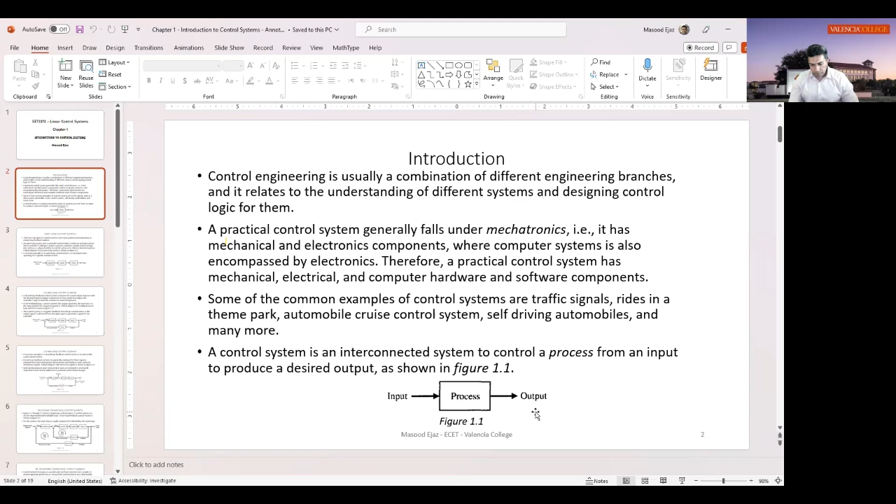So that's an example of a manual control system in which the process is your car or your steering system. You are sending the input, visually inspecting where the car is going, and you want it to be pretty much the same as the input. If you're turning 20 degrees counterclockwise, you want the car to go about 20 degrees counterclockwise.

So that's a manual control system, but that's an example of an open loop control system. There is an open loop control system, and then there's a closed loop control system. So what is an open loop control system?

Here's the figure. You want the desired output response, whatever output you want. As I mentioned about the car, you said, okay, I want the car to go 20 degrees to the left, and I'm moving the steering about 20 degrees. There's a controller, actuator, and process—these are the 3 main components of a control system. And then the output: what is the actual output? You want the desired output to be the actual output, but not necessarily, because there are many factors that can affect the output, and it's possible that it is not equal to the desired output, which is your input.

So if it is not, then of course you have to correct it. With the open loop system, the correction is manual. In the closed loop system, the correction can be automated. That's why closed loop systems are much more prevalent in industry compared to the open loop system.

So what is the open loop system? It uses a controller, control logic, to drive an actuator—an action that a controller takes to control a process. This morning in the DSP session, I also mentioned actuators, which basically convert one form of energy into another form of energy.

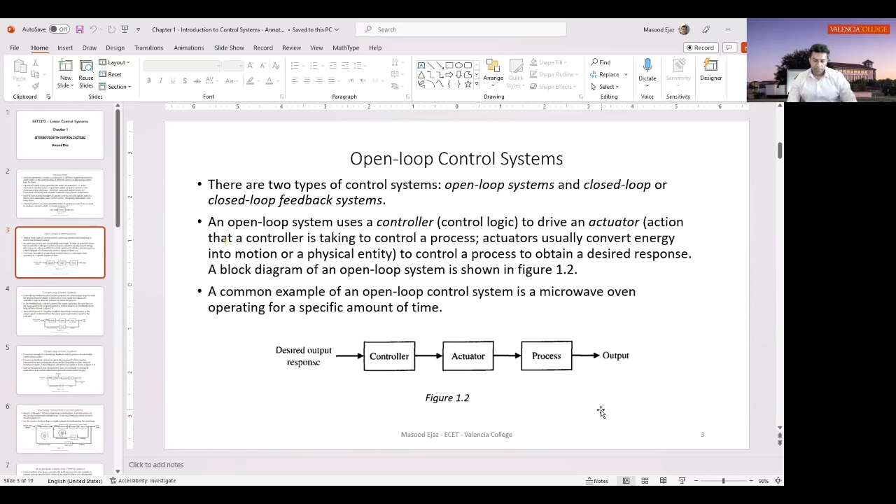And then you're observing: hey, what's my output? If your output is exactly the same as your input, because your input was the desired output, your control system is working perfectly. If it is not, then you have to make changes to some of the parameters in your control system. One common example is a microwave oven operating for a specific amount of time—that can also be represented as a control system.

Let me grab my pen real quick. Okay. Let's see, review. Okay.

So the good thing about the closed loop control system is you have the ability to measure the actual output with the desired output to generate an error signal. If they are too different, there's too much difference between them, then your error signal is going to be high. If there's a little bit of difference, the error signal is going to be low.

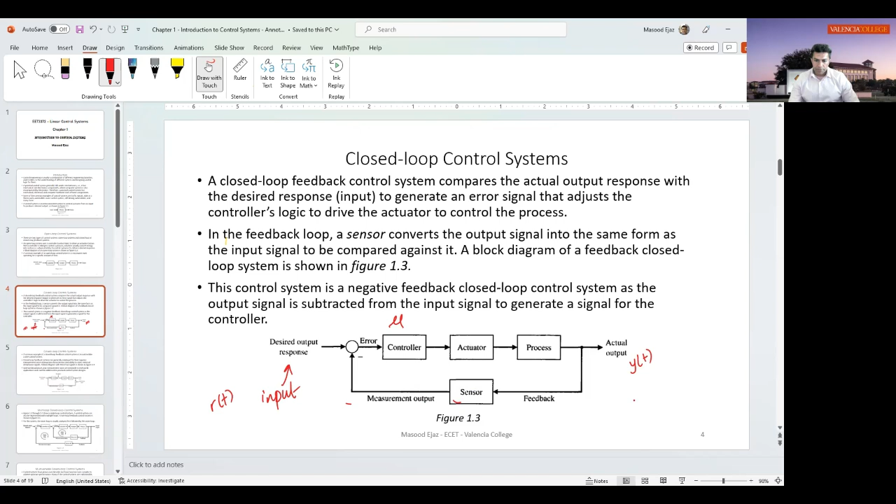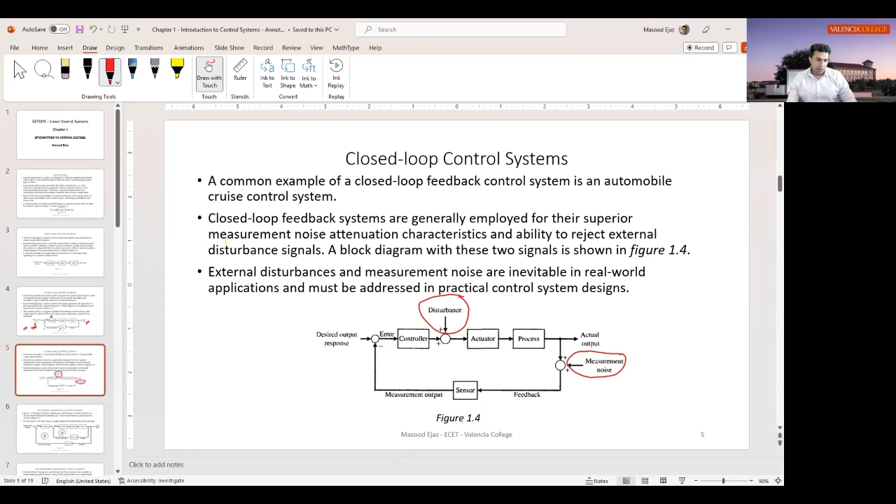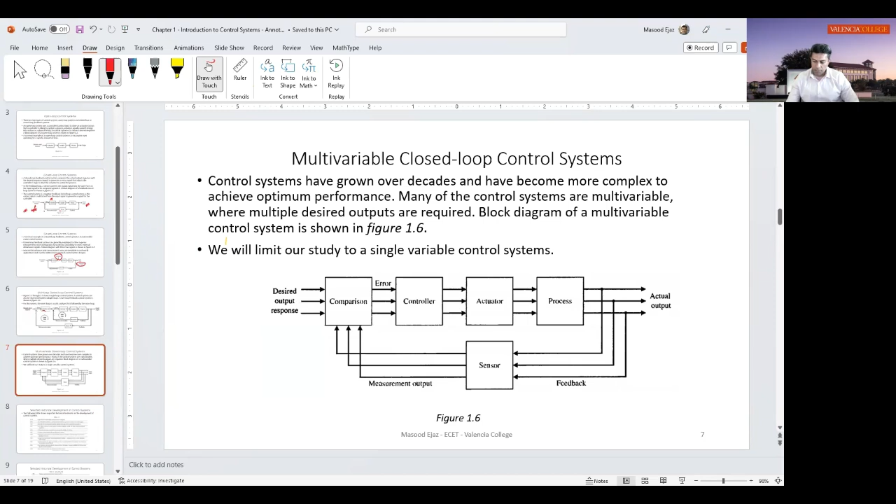But you can have different systems with multiple inputs that you want at the output. Instead of a single signal flowing, you have multiple signals flowing throughout the system, one for each input that you want at the output. So these types of systems are also there. I don't think I'm going to be doing any examples with multi-input, because it becomes too complicated to analyze at certain points. Just want to mention that these practical systems exist, but we'll be doing problems based on multi-loop systems, not multi-variable systems.

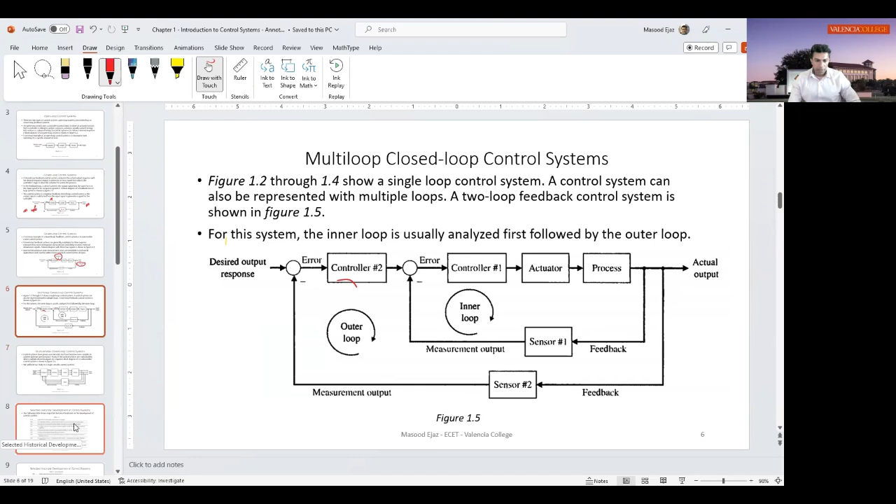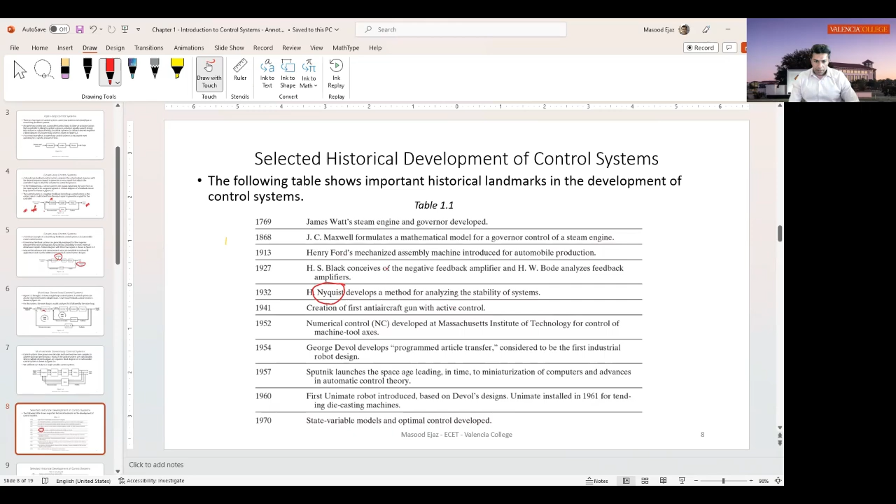I don't want to go all the way back to 2019. I'm assuming when the book was published, I picked up this table from the new book, but it's possible I picked it up from the old book since it ends at 2019. It's 2023, so some major advances must have been made in control systems applications. Not the theory - control system theory really didn't change much, but the applications have changed a lot. So they're just showing the different applications.

GPS is a multi-input control system.

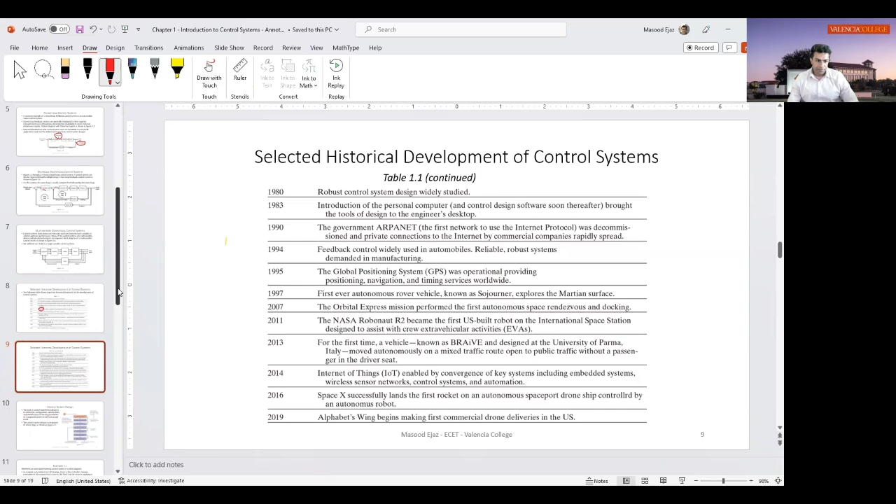What we can do is 1 hour 15. Actually, no, I thought this class started at 5 o'clock. It's only 45 minutes. So we will keep going, and let's see if we can finish before the first break. Then all of us will be happy.

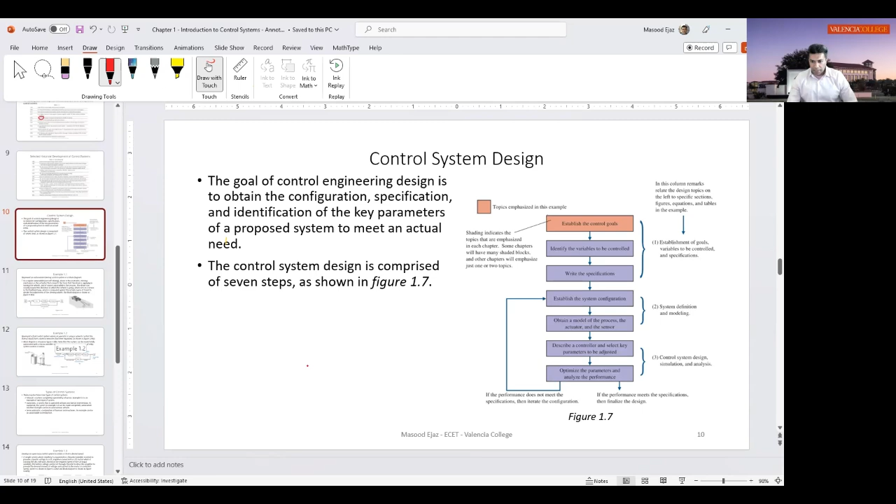All right, control system design. Let me increase the...

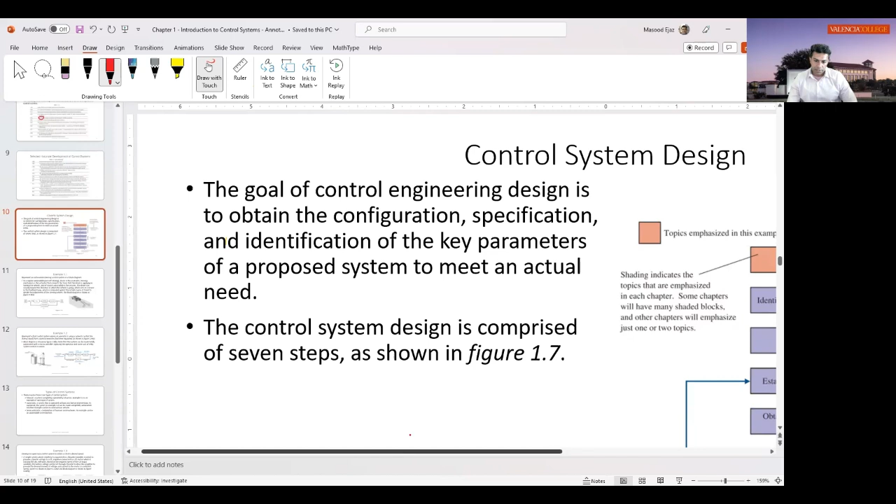So what are some of the specific key parameters to design a control system? They are given in this diagram, flowchart, and again this is from your book.

The first thing you do is establish what your control system needs to do - you establish the goals of the control system. Then you have to identify the variables that are involved to establish those goals.

Write the specifications. If some of you have taken the senior design proposal course, or if someone here is doing the project, you'll see basically similar things when we do senior design. You have to establish the requirements of the project, which are the goals of the project. You write the specifications of the project and all those things - that's basically creating a control system module.

So you establish the goal, identify what type of variables are involved to make those goals successful, and write the specifications of that.

Specifications are basically - if you're using some system, let's say a microcontroller - then how many bits do you want for that microcontroller? How many inputs and outputs do you want? What should be the processing speed? Those are the specifications - so you establish the specifications.

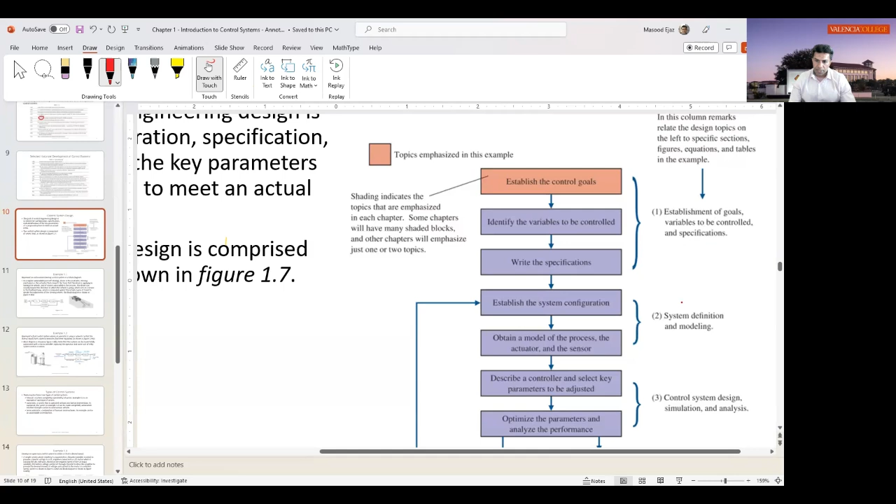So once you choose the specification - establishment of goal, variables to be controlled, and specification - then the second step is system definition and modeling. Establish the system configuration, obtain a model of the process, actuator, and sensor, which is in the feedback loop. Describe a controller and select key parameters to be adjusted for the controller.

I keep calling it microcontroller, just a controller. Based on your error signal, you go back through the feedback loop and change the system configuration based on the error signal. What is the error signal? The difference between the desired output and the actual output - that's the error signal.

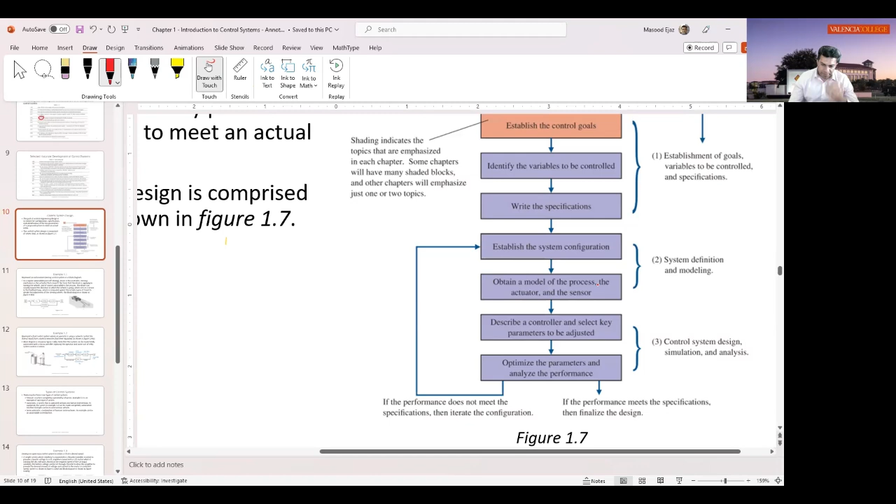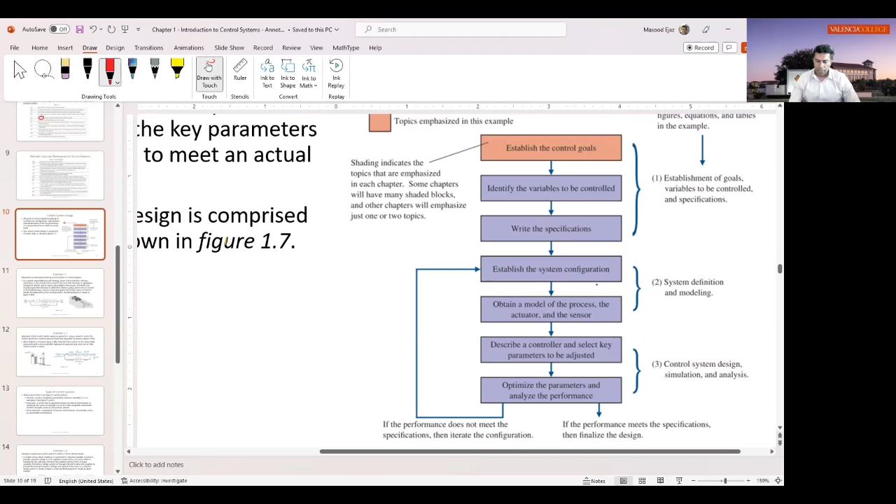So this is 6 or 7 steps of creating a control system from the bird's eye view, the big picture. So let's look at some examples.

This screen is hard to move. Okay, I'm going to put it somewhere on top. All right, here you go.

The steering mechanism is the actuator. You are putting force on the steering, left or right, creating torque, and that force converts into changing the direction of the steering. So steering is your actuator, and of course your process is your car.

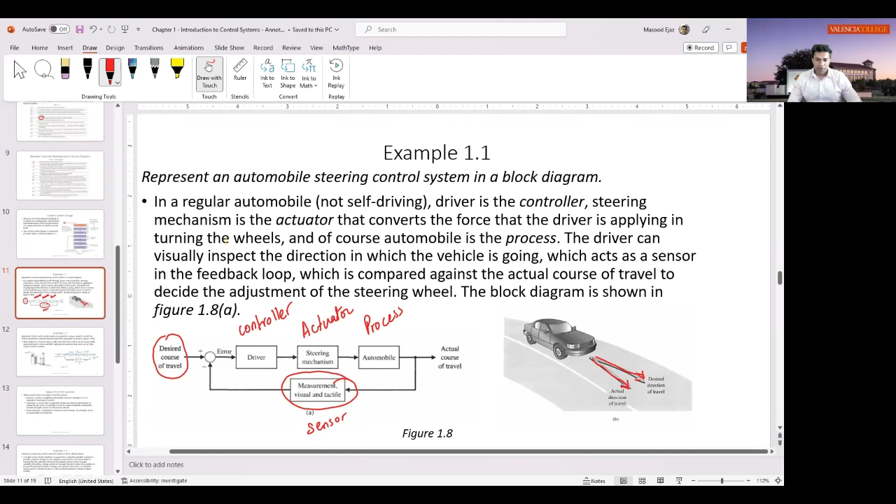One step ahead is, of course, let's see what is next. Okay, so cruise control is going to come next, I guess. Again, a kind of manual control system, and all these manual control systems again can be made fully automated. So your self-driving cars...

You're not the controller. In self-driving cars, the signals that are coming from your sensors that are on your Tesla or any other car, camera signals, signals from IR sensors, radars, and all those - I think Tesla removed the radars actually - but all those signals are coming into the main processor, and based on those signals, it is controlling the steering wheel. So in that case, you're not the controller in a self-driving car.

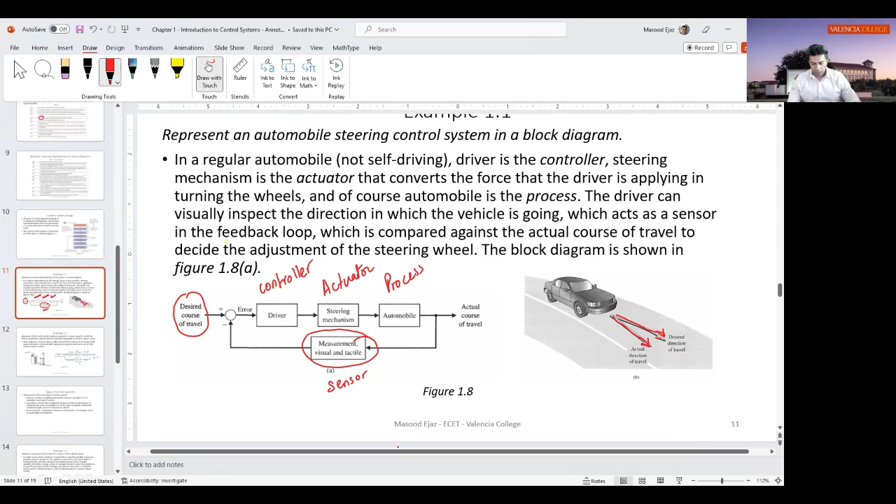The signals that are coming in through the microcontroller, that is the controller actually. Well, microprocessor, microcontroller, or computer, whatever. But this is the manual system. What is this?

All right, so this diagram represents a control system where an operator is using a valve to control the flow of liquid from a tank to keep the fluid level regulated, right over here. So this operator is inspecting the fluid level visually, and he wants the fluid level to be a specific height in the tank. If the fluid input starts filling up the tank, then he is going to open the valve to let the fluid go so that it will stay at that specific level. And of course, if there's no fluid, then he's going to close the valve so that it will stay at that level. So that's the control system.

Again, it's a manual control system. It can very well be made an automated control system very easily. But for this manual control system, you have the desired fluid level, which is your desired output response. As you can see, your controller is this guy, the operator. The actuator is this valve mechanism. He's turning it right or left to control the valve. And of course, the process is taking place in this tank.

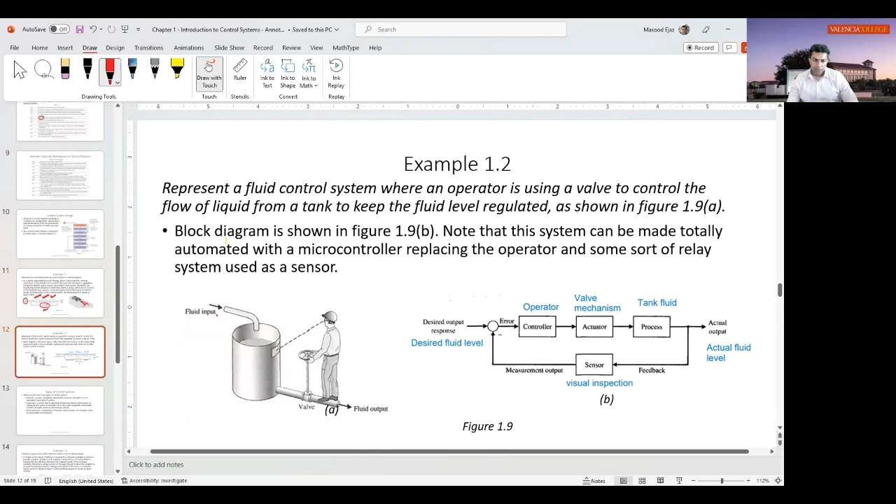The actual output is the actual fluid level in the tank, and he's going to inspect it through visual inspection. Again, if the actual fluid level is higher than the desired fluid level, it's going to open the valve to let some of the fluid go. And if it is equal to the fluid level, it's going to close the valve. If it becomes lower than the fluid level, then it's going to close the valve and let the fluid gather in the tank until it reaches the desired level.

So again, in terms of a control system, it's a manual control system. And these are the actuator, controller, and so on for this control system. As I mentioned, the system can be made totally automated with a microcontroller replacing the operator and some sort of relay system that can be used as a sensor.

Yeah, this system is very common actually. Most water storage systems have a pump basically that can pump the water, and based on the height of the water level in the tank, the pump can turn on automatically or turn off to maintain the height. So this system is very common, and it is a very common automated system basically to keep the fluid level the same in a water tank.

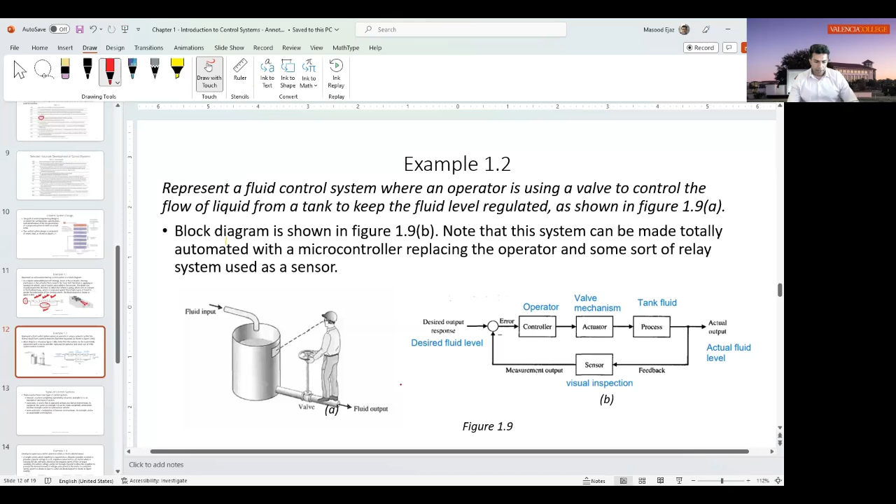So those systems that we discussed were the manual control system, a system completely operated by human, and the automatic control system, where there is no human intervention, a totally automated system.

Many of the systems these days, starting from smart cars to ride control systems using PLCs and all, are automated control systems. They keep detecting the error and keep adjusting themselves to operate as they're supposed to. Of course, there are exceptional conditions, that if this exception happens, turn the ride off or do this or do that.

Many systems are semi-automatic, like your assembly lines, automobile assembly lines, where you have robots doing a lot of things, plus humans are there to assist in building an automobile. So that's a semi-automatic control system. So all three of them exist - automatic, and semi-automatic, they are much more of interest rather than manual control system.

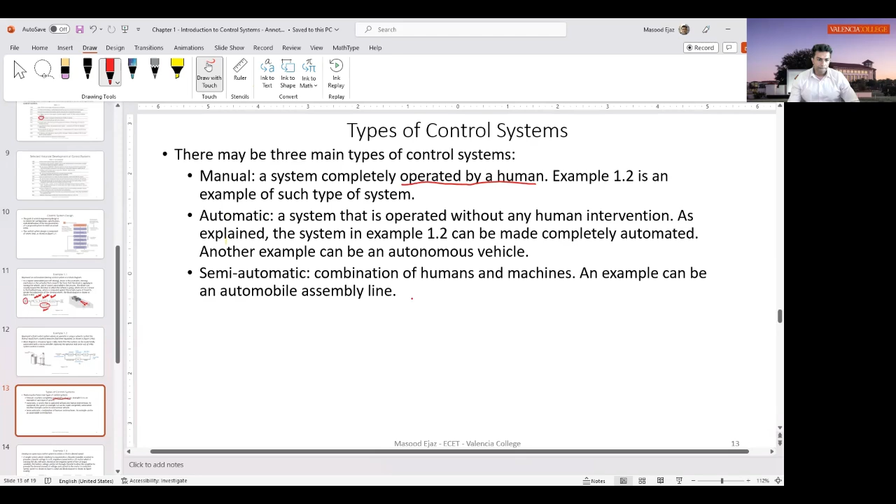All right, let's see example 1.3. A simple system where a battery is connected to a variable resistor to provide a specific voltage to a DC amplifier connected to a DC motor, which is rotating a disk. I don't know what I was trying to write over here, but basically it is a rotating disk.

You can assume it to be a CD player or something, and based on the voltage and current coming into the motor, it will increase or decrease the speed of the rotating disk. So based on the required speed of the CD input variable, the battery voltage can be set through a rheostat to drive the amplifier to provide the desired amount of voltage and current to the motor to control its speed.

This is an open loop control system. As you can see, there is no feedback. You need desired speed, which is sent by specific voltage to the controller, which is this amplifier, the DC amplifier. And that is going to send the current, higher or lower, based on what speed you want, to the DC motor, and it's going to start rotating that disk at that specific speed.

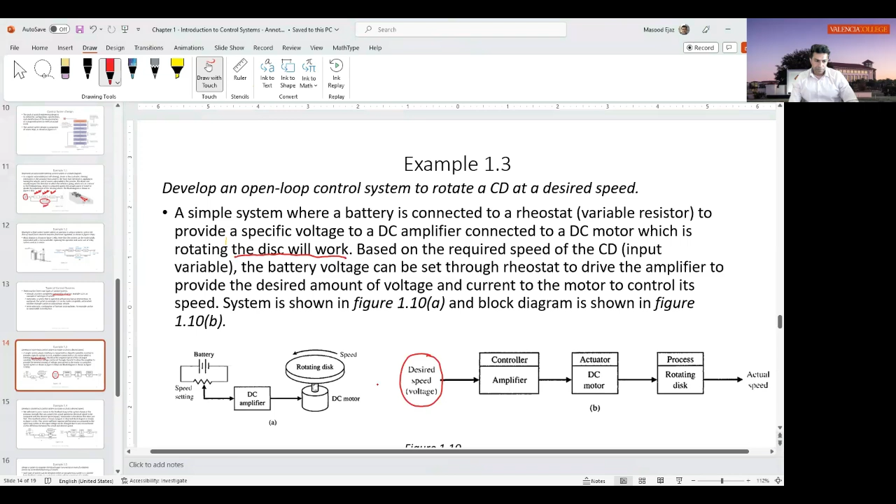Same thing, but with the feedback loop. So now you are adding a tachometer in the feedback loop. That's the sensor - so you're measuring the actual speed, and the tachometer is converting that speed into a voltage signal, an electrical signal, which is measured against the desired speed. If they are the same, the error is 0, or if they are very close to each other, the error is very small, meaning the actual speed and desired speed are very close. If they are not the same, the error is going to be large, which will make the amplifier send a higher amount of voltage or current to the DC motor, speeding up the rotation of the disk.

So if the error is positively large, that means actual speed is less than the desired speed. If the error is negatively large, that means the actual speed is more than the desired speed, because remember, you're subtracting the actual from the desired speed. So the error can be positive or negative.

If the error is negative, that means desired speed is less than the actual speed. In that case, whatever the error signal is, the amplifier is going to reduce the voltage it is sending to the motor, reduce the amount of current, and the speed of the motor is going to be smaller. It's going to slow down, basically. So that's the example of the same system we had, but using a feedback loop, using a tachometer as the sensor to make the system fully automated.

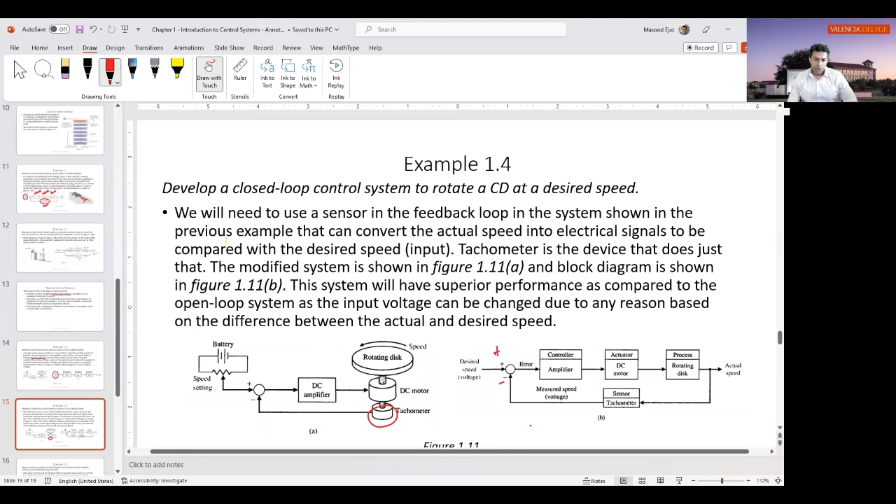All right, another example. Design a system to regulate the blood sugar concentration level of a diabetic person by controlling the dispensing of insulin. This is a very commonly used system. Many people who have diabetes use this type of system.

This type of system can be open loop, timer based, dispensing a specific amount of insulin at a specific time without actually measuring the blood sugar level. Many systems are closed loop, measuring the blood glucose level, and based on that level, dispensing the amount of insulin required for the body. So both systems exist actually, open loop as well as closed loop.

Many people actually use the open loop system because they say, we take insulin only at a specific time after we eat, lunch or dinner. So only at that time they want to dispense a specific amount of insulin. They're not measuring anything, or they're measuring manually, and based on that adjusting the amount of insulin needed. But they don't have to do that if using a closed loop system that measures the glucose level automatically, and based on that adjusts how much insulin needs to be dispensed and when, which can be set through closed loop systems as well.

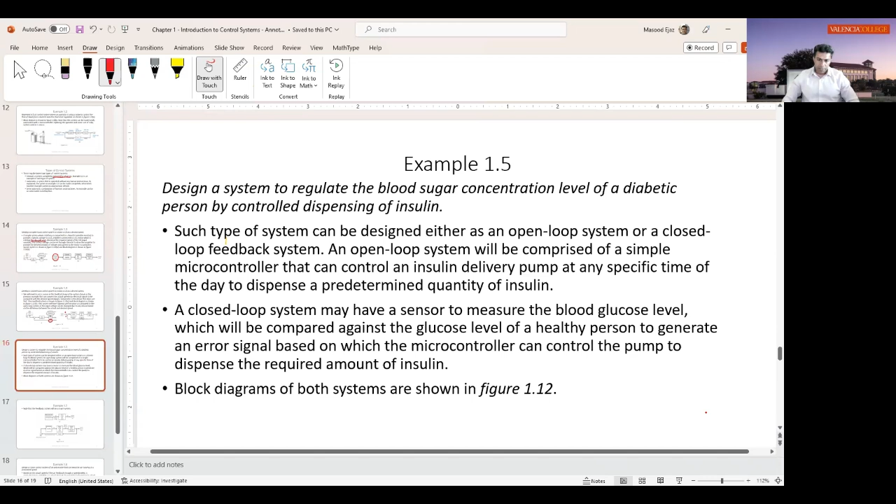So both systems can be created, they do exist, as I said. And these are the block diagrams of those systems. The top one is the open loop. So you have a microcontroller program, signal generator basically, that at a specific time starts sending the signal to the motor, pump, and valve to dispense a specific amount of insulin.

And in the feedback loop, you want your glucose level to be a specific value. Again, you're sending the signal through the microcontroller, amplifier, motor and pump, insulin delivery rate, and your process is the human body, of course. After it dispenses the insulin, the system measures the actual glucose level, and based on that, it sends the data back through the sensor.

And then it is compared against the desired glucose level. If it is low or high, based on that, the insulin amount is adjusted. So as I said, both systems do exist. Many people use a simple system, very simple, manual dispensing without a feedback loop. I've seen many people actually using that simple approach because they say, we only dispense at a specific time, so we don't really need a closed loop system.

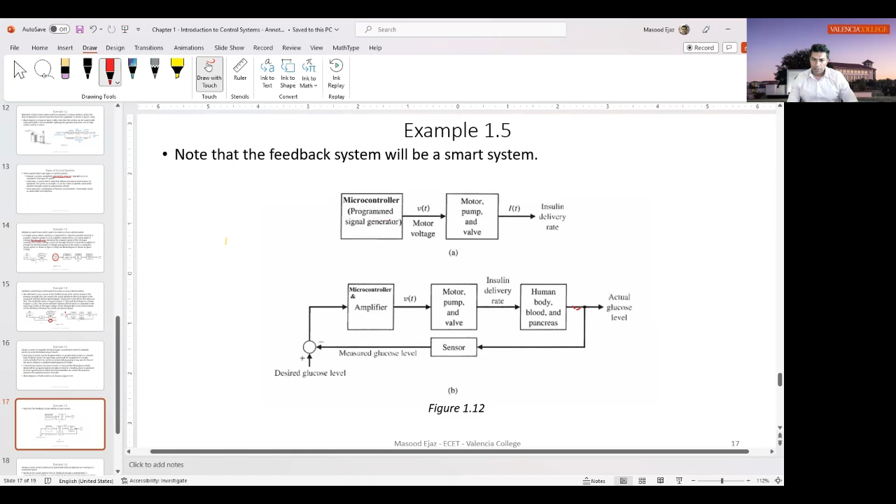One of the last examples is a cruise control system in an automobile that can make the car move at a prescribed speed. Everyone has used cruise control, I'm assuming. So you have a desired speed, and you have a microcontroller, of course. In this case, the actuator I'm putting is the fuel injector system, for gas cars, not electric vehicles.

How much fuel is going into your engine will determine the speed, how much you're burning, basically. An automobile engine is the process where the burning is happening. Of course, if it comes down to an electric vehicle, then you're going to change those things to how much current the battery is supplying to the motor, basically. So your actuator becomes your battery, how much current it has to supply to the motor to run it faster or slower to keep the desired speed.

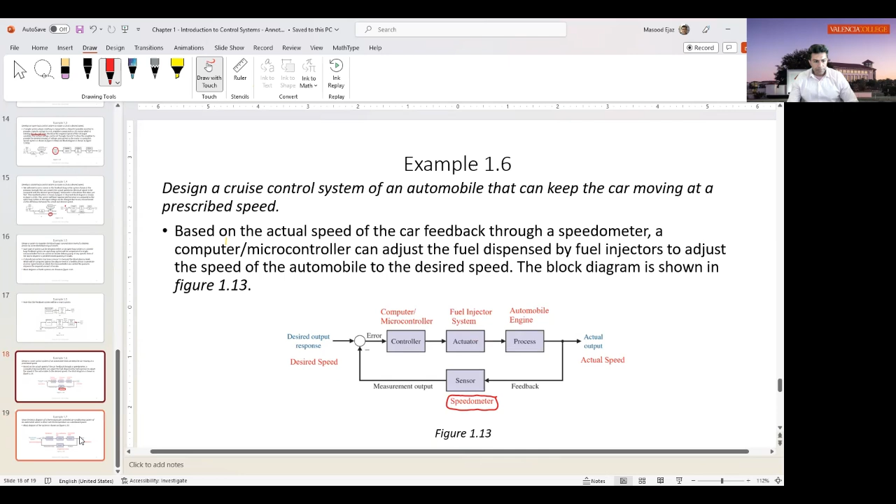The final example for today is the thermostatically controlled air conditioning system I mentioned earlier, in an automobile where a driver sets the temperature on a dashboard panel. So you want a desired temperature. It can be your automobile, your home, wherever - your AC, basically your desired temperature, whatever you want. You have the thermostat, which is your controller, and the air conditioning unit. In this case, the automobile cabin is the process. If you're using a home, then your home or room is the process on which the actuator is working.

You're measuring the temperature using a temperature sensor, and comparing it against the desired temperature. So the temperature sensor is basically converting the actual temperature into electrical signals to measure against the desired temperature. Based on the error, you can control the thermostat, making it cooler or warmer, so that your cabin stays at a specific temperature.

So this is basically your adaptive air conditioning system, where you can set it. The older cars didn't used to have that - you could just set a temperature and it would keep blowing the air irrespective, even if it is much cooler than what you want. I have one old car with no adaptive air conditioning system - you just set the fan speed and how much cooler you want, and it just keeps running. But in most newer cars, you can set the temperature, and it will hold that temperature for however long you want.

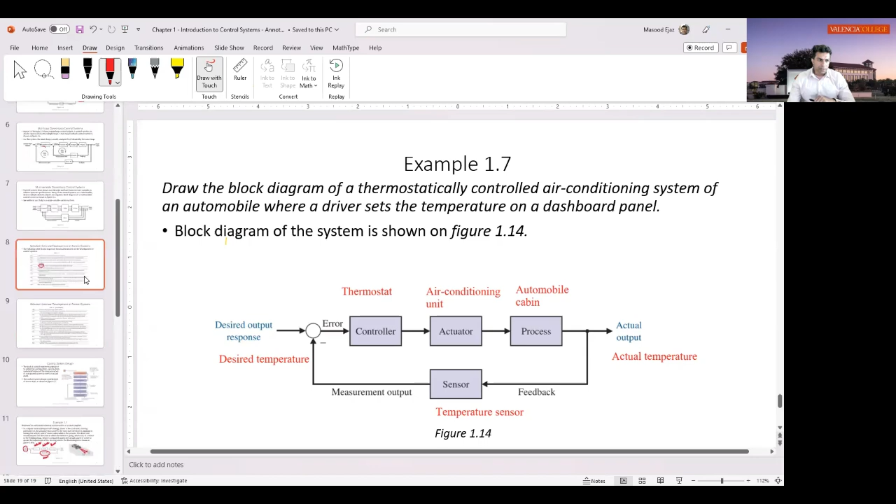So we looked at different examples of how to create block diagrams for different types of practical control systems. We looked at multivariable, multi-loop control systems, and then discussed open loop systems as well as closed loop systems. Closed loop systems, as I said, make up 99% of systems - very few systems are open loop. This is basically some basic introduction about what we're going to be doing in this course, what control systems are, and how we can put together different control systems in block diagram form, which we'll use to characterize different control systems.